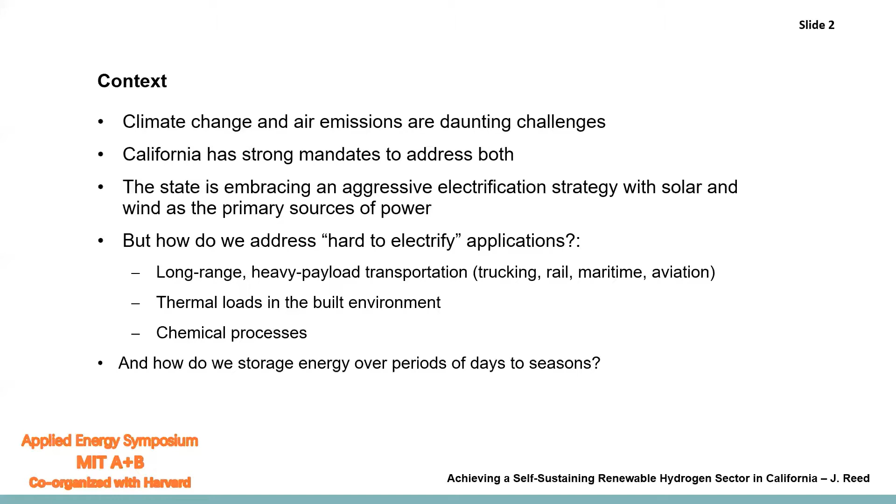We need solutions for thermal loads for certain chemical processes, and we have growing challenges of renewable intermittency on the electric grid, all of which can be addressed in part through hydrogen. A growing number of nations and regions are adopting decarbonization strategies that explicitly include hydrogen as one of the foundations. There are many of these, but they typically land on a fraction of primary energy of around 20%, plus or minus, being served by hydrogen.

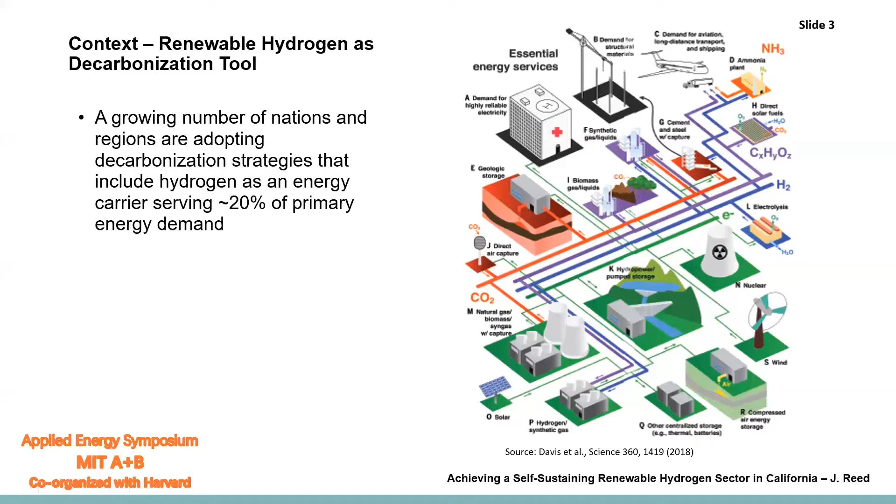In addition to hydrogen used directly, in combination with CO2, we can form hydrocarbons. So these purple and blue lines both reflect hydrogen to a certain extent. You can see that in this vision, hydrogen is a key underlying backbone of the solution.

California has launched the renewable hydrogen sector, but now we need to consider how to scale it up and how to make it self-sustaining. California is an early adopter of fuel cell electric vehicles and committed $200 million in support to provide an initial network of refueling stations, giving adequate confidence to early adopters of fuel cell vehicles that they'll have convenient refueling. We currently have 40 refueling stations and about 7,000 fuel cell vehicles, but we're expecting that to scale rapidly.

California lacks a comprehensive cross-sectoral roadmap for the evolution of the renewable hydrogen ecosystem and the financial and policy support needed to successfully launch and scale the sector. So the topic question here is: what will it take in terms of cost, time, and policy to achieve a self-sustaining renewable hydrogen sector in California, by which we mostly mean it's cost competitive and can attract private finance.

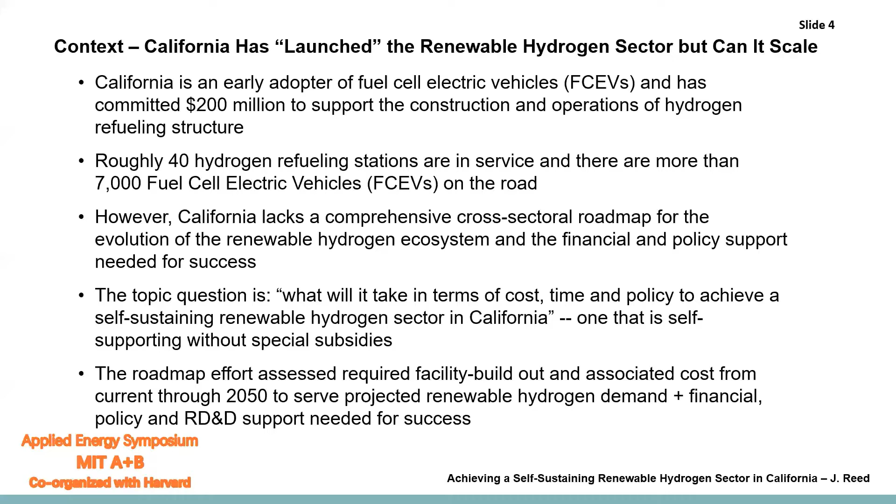The roadmap effort looked at the requirements for a facility build-out from now through 2050 and assessed the costs and then policy and related support needed to achieve the build-out. The analysis is built up in several building blocks. The ultimate goal is to understand how many renewable hydrogen production facilities are needed, phased over time, of what type, where they should be located, and what policy, regulatory, and financial support is needed to achieve that.

The key building blocks of the analysis are, first, how will the cost of dispensed renewable hydrogen evolve over time? That had three primary components feeding into it. The first was an assessment of the progression of renewable hydrogen production technologies, how they would evolve in cost and performance. Next, we assessed the cost and availability of feedstock going into those pathways. And finally, we assessed the costs of the supply chain after the plant gate to the point of end use, to create an overall picture of the dispensed or delivered cost of renewable hydrogen.

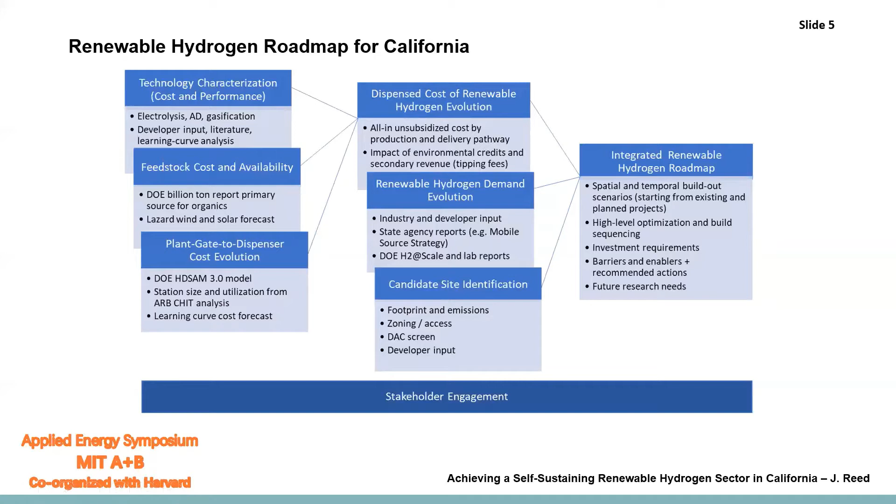Next, we needed to assess the evolution of demand in order to understand the number of facilities that need to be built over time to serve the growth in demand for renewable hydrogen. Finally, we needed to conduct an assessment of where the facilities should be sited. And then, with that picture of the requirements for the sectoral build-out and its costs, we could address the issue of policy, regulatory, and financial support needed for a successful launch and scaling of the sector.

So we considered a number of pathways for producing renewable hydrogen in this analysis. You can see here that there are quite a number of pathways that can be used for producing renewable gaseous fuel in the form of methane or hydrogen. Our focus here, of course, is hydrogen, but renewable biomethane can be reformed to hydrogen, and that's one of our primary pathways. So we considered three pathways.

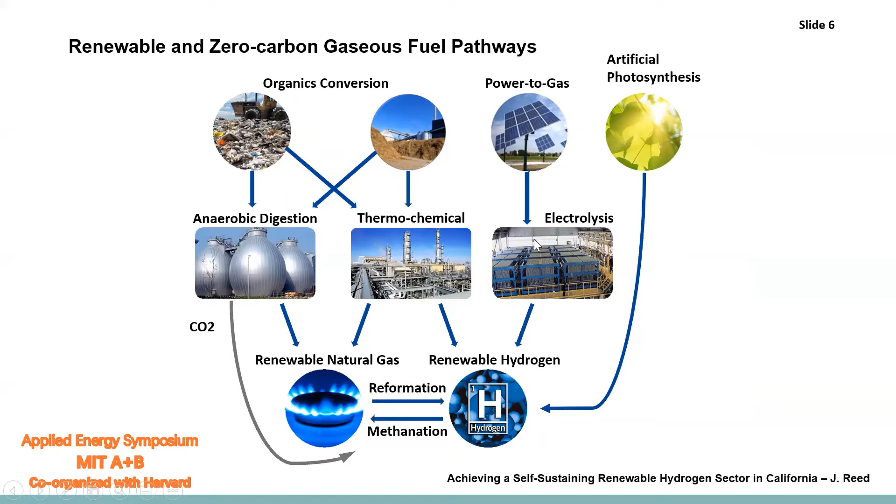First is anaerobic digestion of wet organic material, which is then reformed to create hydrogen. Next, the direct thermochemical conversion of woody biomass to make hydrogen. And finally, water splitting via electrolysis using renewable energy as the third pathway for renewable hydrogen production.

So just to jump forward to the bottom line, our conclusion is that the cost reduction trajectory for dispensed renewable hydrogen can be quite steep, and that in fact, within a roughly 5-year time horizon, we can achieve a point where renewable hydrogen is cost competitive on a fuel economy adjusted basis with conventional fuel. Over the long term, renewable hydrogen actually becomes less expensive on a fuel economy adjusted basis than conventional.

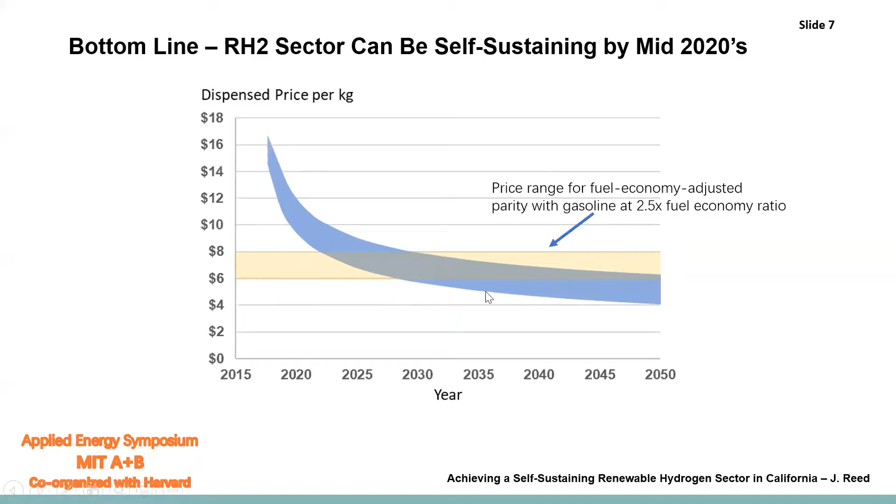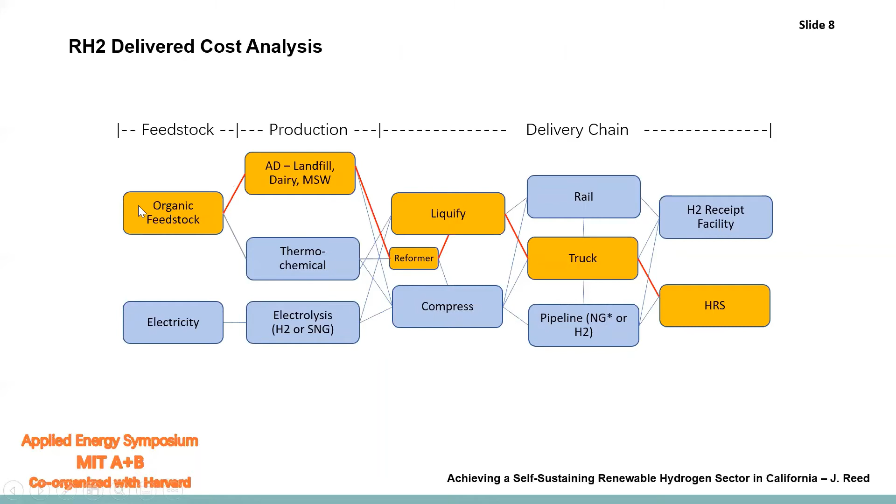By this time frame, however, we're competing not necessarily with conventional, but with battery electric drive as an alternative. At these cost levels, we expect that renewable hydrogen will be in the same cost range as renewable electricity in transportation. To build up this picture of delivered cost, we need to assess the costs of each component in the value chain, from the feedstock through conversion all the way through to dispensing. So we'll talk about that analysis here.

So the technology forecast was primarily an extensive secondary research effort, augmented by some of our own analysis, particularly on learning curve forecasts. The research that we consulted and conducted included a number of methods for forecasting. We did more than 40 interviews during the course of the work, but we also consulted a lot of other studies using expert elicitation, progress rate. The DOE's H2A tool uses a bottom-up approach, and we also can look at analogy or proxy. For example, coal gasification provides some insights to biomass gasification.

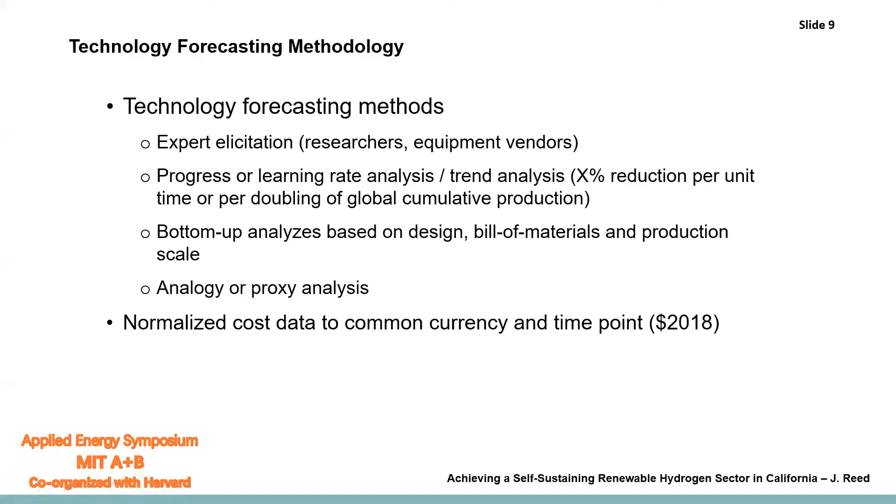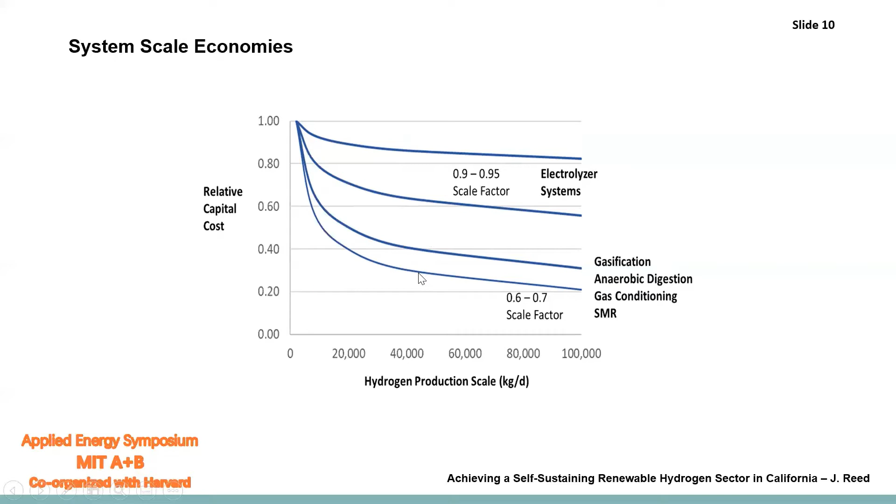Then we normalized all the cost data to a common currency and a common time point. And we also addressed other factors in the analysis, such as scale. Different sources would report facility costs at different scales. We normalized them to a common scale. And for our build-out analysis, we established reference plant sizes that reflect minimum efficient scale for the different technologies.

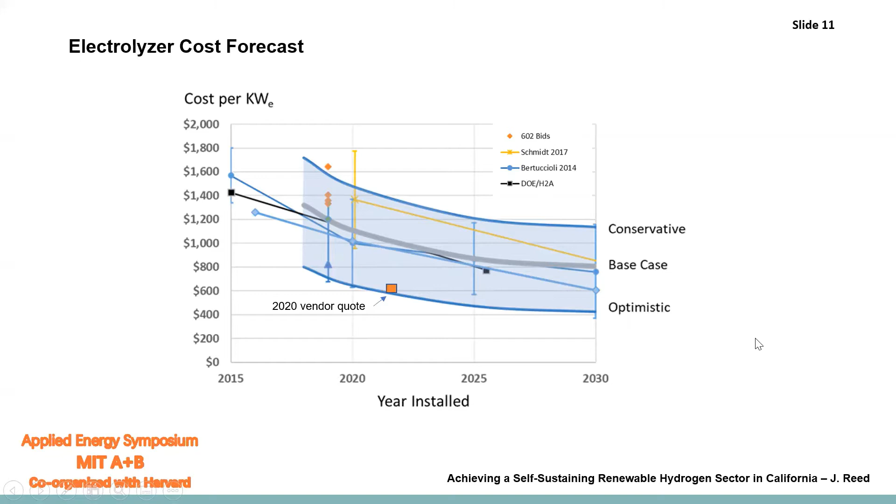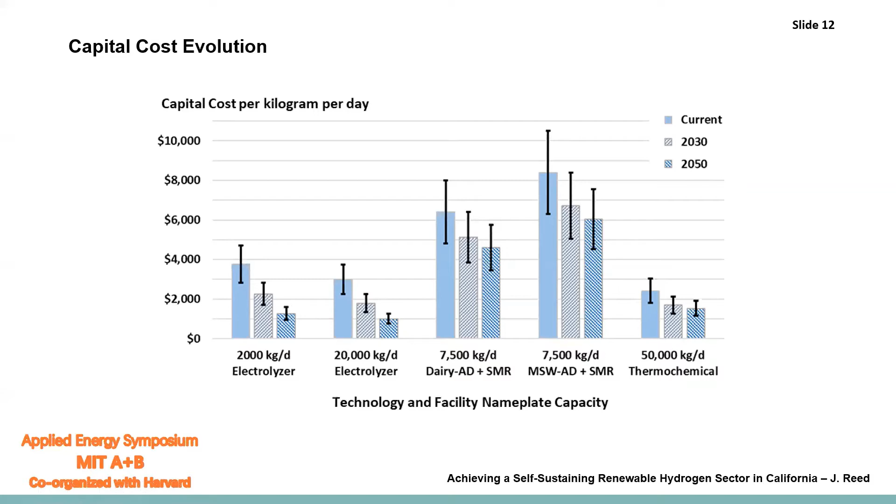So we performed similar analysis for all of the conversion technology pathways, and what you see here is the progression of capital cost across the different technologies. All of them are expected to show significant cost reduction. Electrolyzers have the highest learning rate among these different technologies, and so they show the most dramatic decrease in cost, both because of the higher learning rate and because currently they're in the earlier stages of deployment, where the other technologies have a higher install base to start.

The next component of the analysis is feedstock supply and cost. For the organic biomass feedstocks, we primarily used the Department of Energy billion ton study to determine the supply availability of biomass feedstock at various price points. We considered a price range for feedstock, or a recovery cost range, from $60 to $100 per dry ton. That yields a potential supply of 700 to 1,200 petajoules per year of raw biomass.

We also forecast the cost of wind and solar as feedstock for electrolytic hydrogen production, and adopted a forecast that's in range of what you're hearing from most sources these days, which is wind and solar will track below 3 cents per kilowatt hour by the late 20s.

However, electrolytic renewable hydrogen cost declines very rapidly as global installations of electrolyzers increase. And so by the mid-20s and forward, electrolyzers compete quite well on cost with thermochemical conversion, ultimately projecting to be perhaps a bit cheaper. Anaerobic digestion is a more expensive conversion technology, but as we'll talk about later, there are some policy mandates that will help offset this cost differential, such that the reformed biomethane pathways are on a net basis cost competitive with these others.

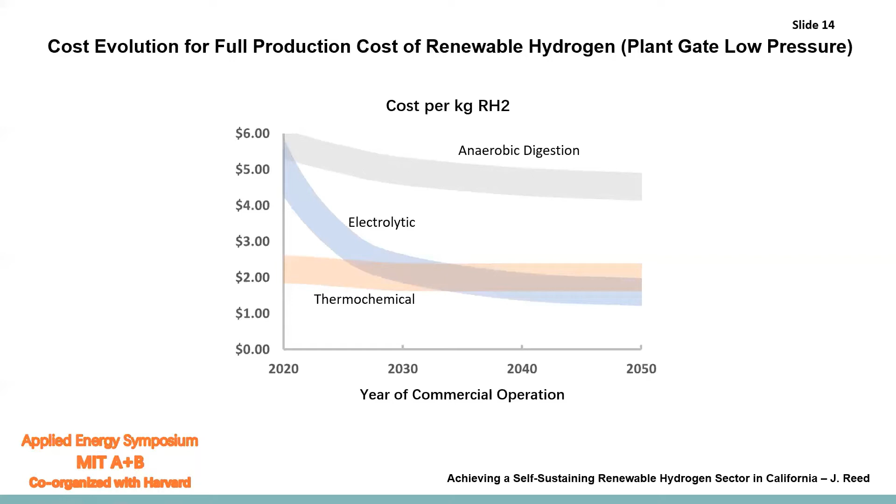So the next question is, what are the costs incurred from the plant gate through to the dispenser? There are two approaches used in the renewable hydrogen fuel supply chain in California: liquid hydrogen delivery and compressed gas delivery. So in the first pathway, the produced hydrogen is liquefied in a liquefaction facility and then put in liquid hydrogen tankers, which then supply that hydrogen to the hydrogen refueling station, storing it on site in liquid form and dispensing it as needed.

Next is the compressed hydrogen pathway. So in this case, the renewable hydrogen is compressed to high pressure, put into tube trailers, transported to the station, and stored on site in gaseous form. Our assessment of the cost for this part of the value chain was taken directly from a Department of Energy tool, the H2A Delivery Scenario Analysis Model, HDSAM.

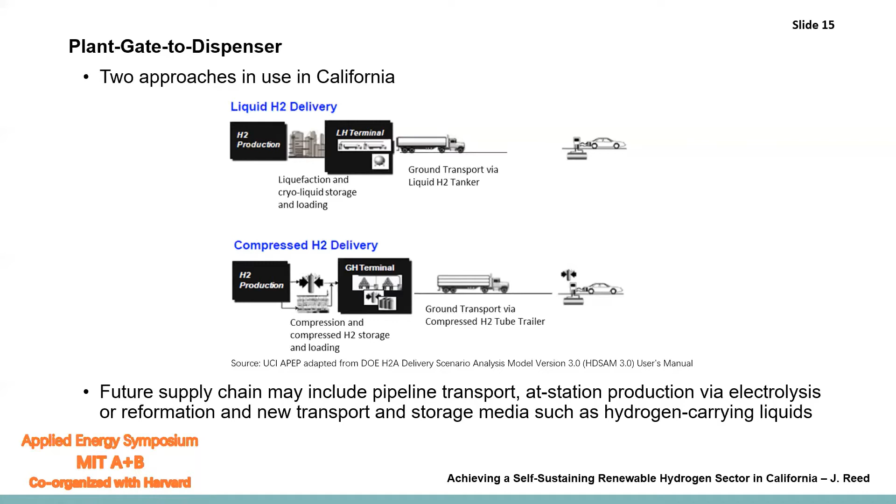The future supply chain may include other modes of transport, like pure hydrogen pipelines, at-station production, and new storage media such as liquid organic carriers and things of that nature. Those won't change the fundamental conclusions of the analysis because they'll be adopted to the extent that their economics are equal or better to what we're projecting with these current supply chains.

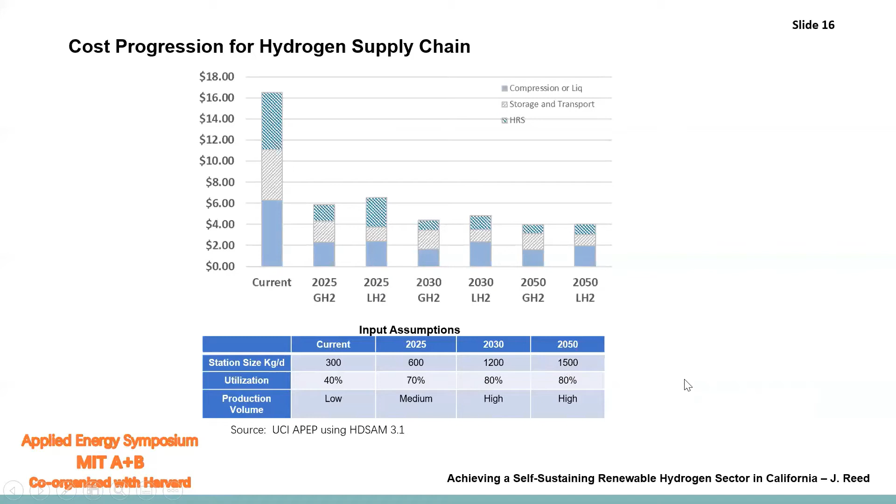In addition to the utilization, station size increases somewhat over time. As each generation of new stations are installed, they're becoming larger. And so there's some benefit of scale economies, but also global growth in the number of stations deployed will lead to standardization of solutions and cost reduction of components in the supply chain.

By 2030, many of them are within the target cost range at the midpoint of the projections. And this, at this stage, is without carbon credits. When those are applied, you'll see that we come well within the target range.

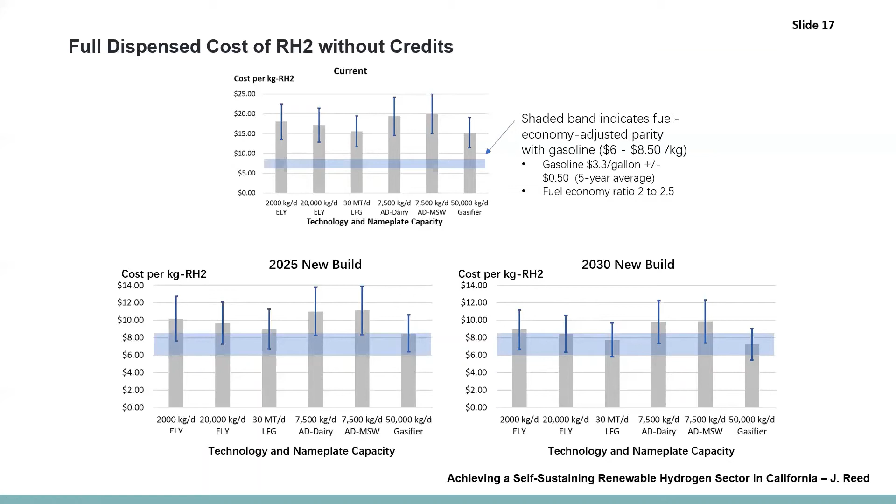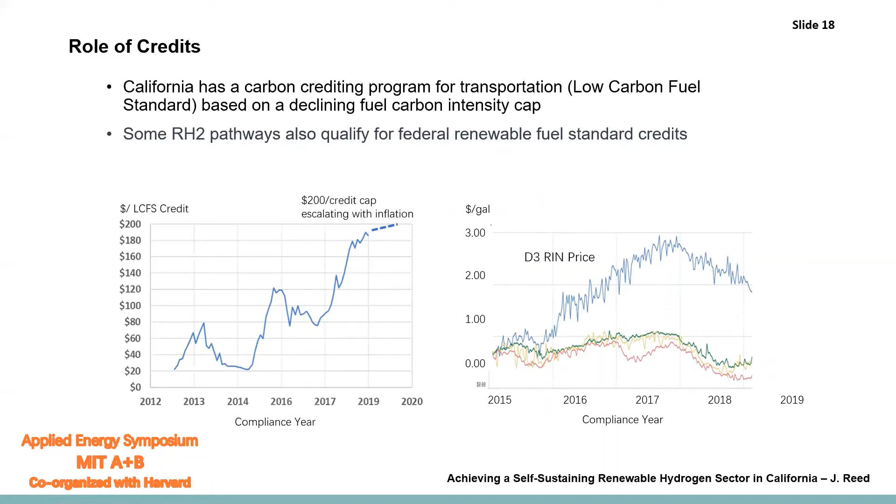So another policy issue, to the extent this program continues, is to ensure that all of the renewable hydrogen pathways qualify. So to give a little quantitative flavor of the impact of credits, the Low Carbon Fuel Standard Credit Program has a declining carbon cap, and basically fuels generate credits based on the difference between the carbon cap and the carbon intensity of a particular fuel.

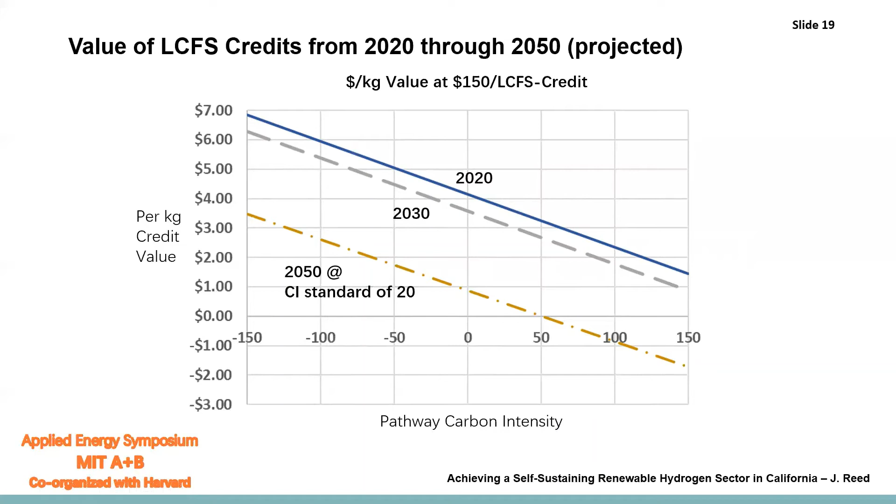So as that carbon cap declines, the number of credits generated by a zero carbon fuel reduces, and so by 2050, your LCFS value is much lower. And what that means is that the underlying technology costs need to progress in a way that they can make up for that difference. So quickly here, speaking of biomethane, there's a factor that comes into play there, which is not carbon credits, but it's tipping fees.

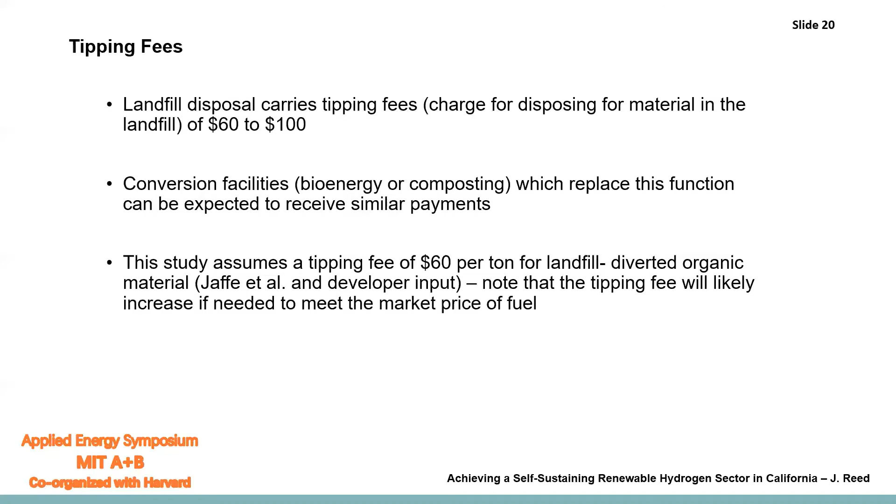California has mandates prohibiting the disposal of organic material in landfills, and it's a ratcheted standard. But by the late 20s, landfill disposal of organics will be completely prohibited, and so anaerobic digestion facilities become an effective disposal mechanism for that landfill diverted organic waste. And like landfills, we can expect those facilities to receive tipping fees from the parties, municipalities, and others disposing of the waste. That's currently the case, and we expect to see that continue. Those tipping fees effectively offset the higher cost of creating biomethane through anaerobic digestion.

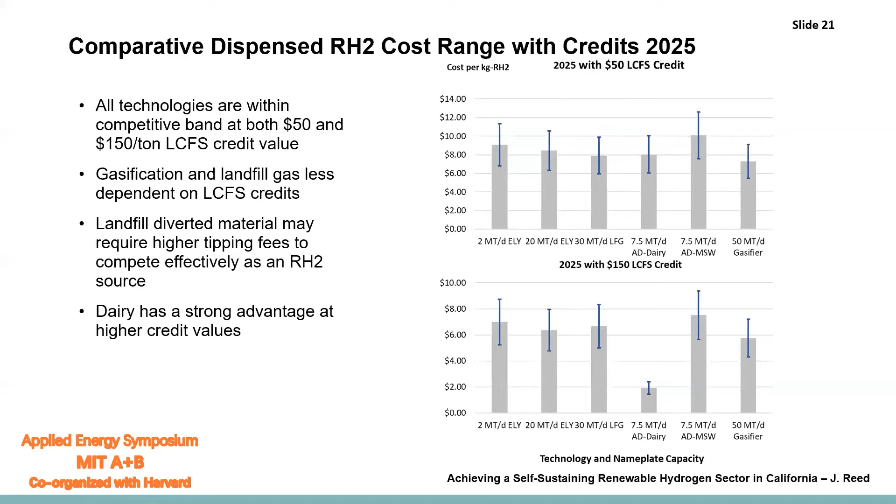So if we look at the cost comparisons, including credits at a $50 credit cost level and then a $150 per credit cost level, we can see that all these fuels are well within our target range by 2025 at a $150 credit value, and they're on the higher end of the range at a $50 LCFS credit level. One fact to point out is that dairy biomethane has a very low carbon intensity, so its net cost relative to alternatives depends a great deal on LCFS credit values.

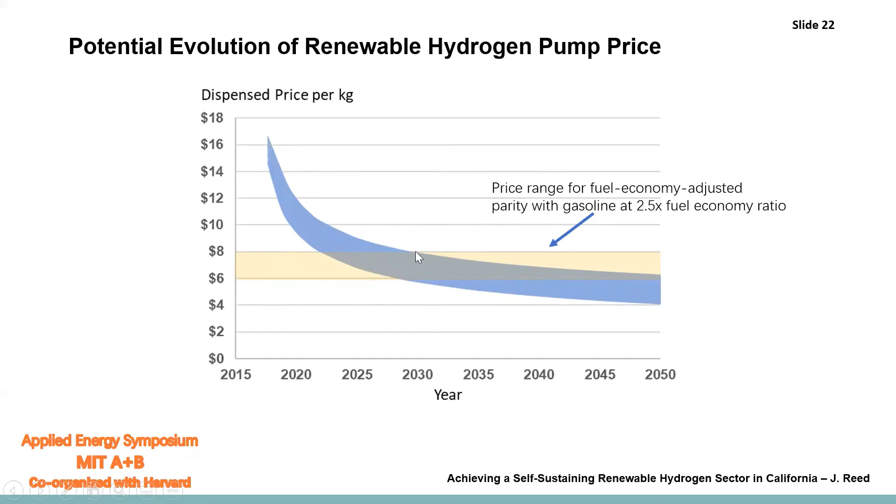So this gets back to the slide I showed earlier, and the analysis we've just shown is what supports this cost progression forecast. And then to reiterate, we see this coming into the competitive range with conventional fuel somewhere between 2023 and maybe the late 20s, depending on how costs project.

So now we turn to the question of demand. There are 65 million metric tons of hydrogen produced and consumed annually worldwide. All of these current applications, which are dominated by petroleum refining and ammonia production, are candidates for renewable hydrogen demand in the future. In addition to these traditional uses for hydrogen, new application areas come into play when we think about decarbonization strategies. So two primary additional applications that come into play are transportation and support of the electric grid.

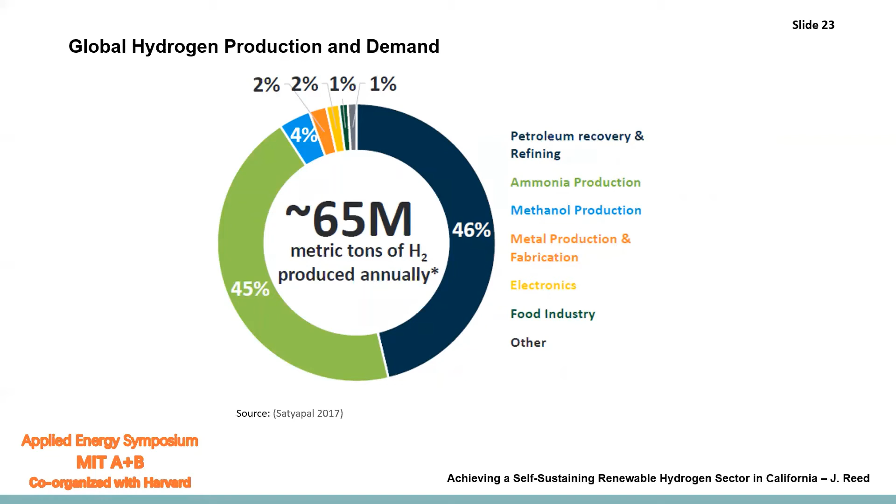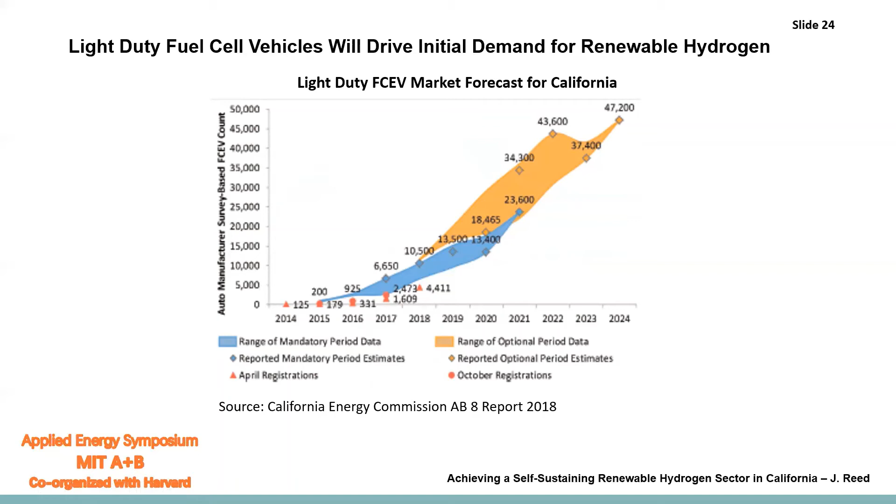But beyond the light-duty market, renewable hydrogen can be an effective solution for all modes of transportation, from local delivery, long-haul trucking, transit, refuse. But in addition, even higher fuel demand, higher payload applications like marine, rail, and there's even work ongoing to use hydrogen for aviation.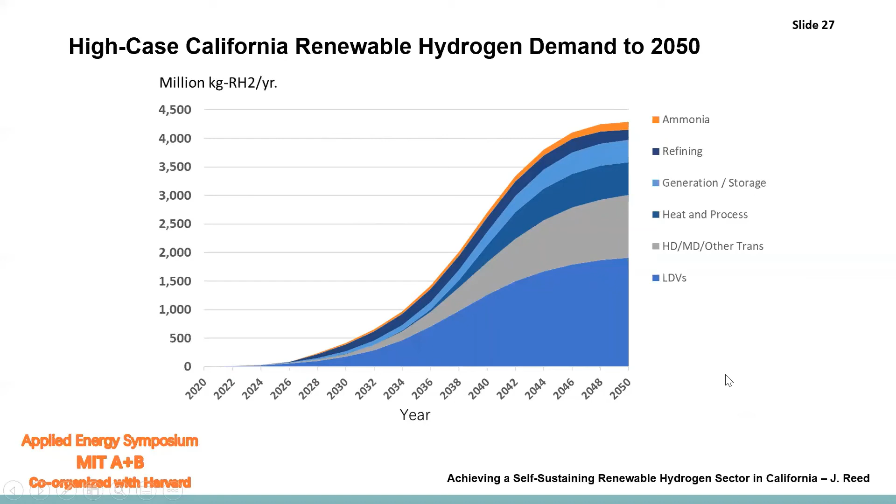But as you can see here, by 2050, this scenario projects 4.2 billion kilograms of renewable hydrogen demand in the state. So that's a lot of new facilities required to serve that demand. You can see that here.

So if we assess what facility build out is required to serve that demand, you can see in this figure a scenario depicting that. This figure shows the annual build of new facilities with these bars, with the colors reflecting the different technologies deployed in each particular year. The yellow curve reflects the aggregate growth in renewable hydrogen supply in the state. So we begin to see a ramp up in the late 20s.

The build out accelerates substantially in the 2030s and 2040s and is effectively complete in the 2050 timeframe, driven in large part by the timing of our decarbonization mandates in California.

So we'll need several hundred facilities to serve this load. That seems like a daunting construction challenge, and to some extent it is, but it's comparable to what we've seen in terms of build out in the wind and solar sectors.

The cost will be in the range of 50 to 75 billion, which also looks to be a rather large number, but for context, it's roughly equivalent to what we're spending in the petroleum fuel sector today.

So before moving on to the question of where these facilities should be sited, I'll just briefly talk about the technology splits or market shares here. For sake of time, I'll have to be pretty brief.

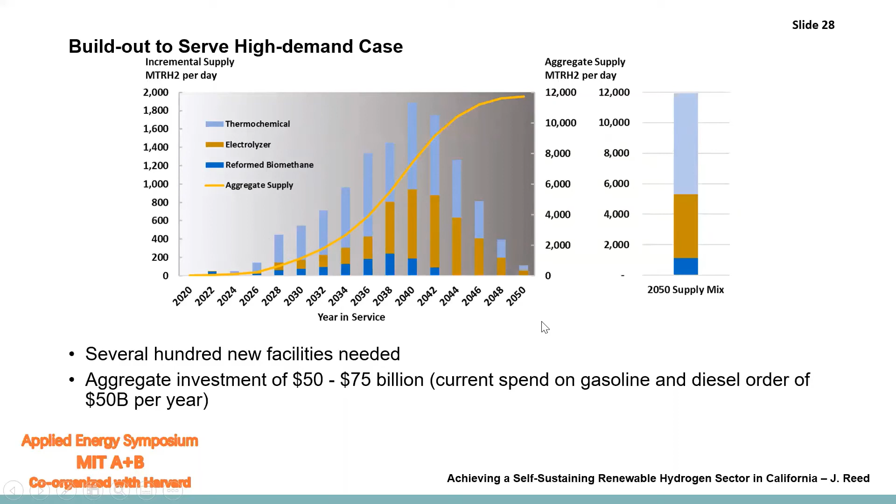So now we turn to the question of where these facilities should be sited, and I'm going to pick up the pace a little bit for the sake of time. We established first areas that were unsuitable for building facilities, and then for each facility type, we established land requirements and infrastructure accessibility. In all cases, proximity to feedstock is an important element of the siting analysis.

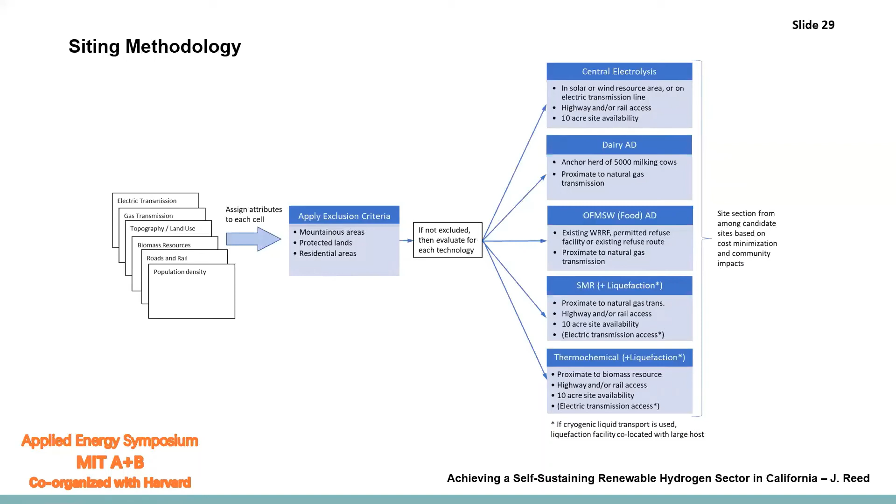So you can see that the different feedstocks are concentrated in different areas. In some cases, like thermochemical systems, proximity to feedstock is the dominant siting consideration, so that's where you'll see most of those facilities. The organic waste facilities are generally in urban areas, and dairy biomethane projects, of course, in the San Joaquin Valley.

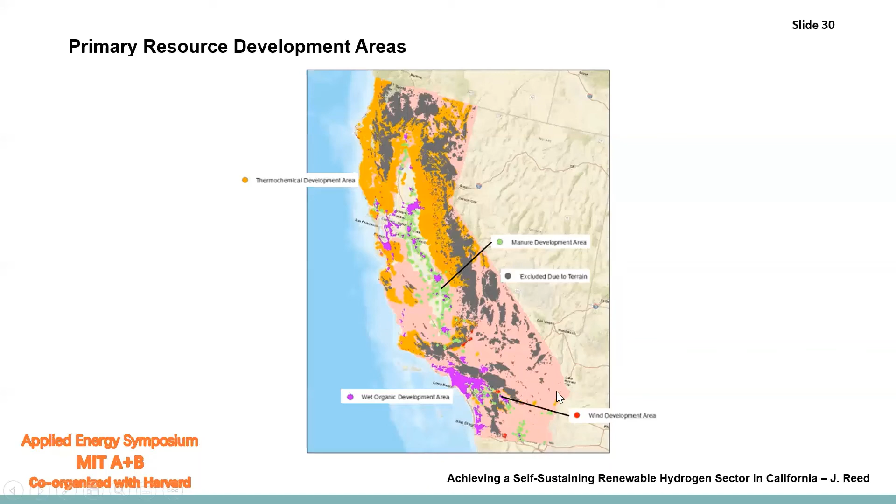And then electrolyzers could be sited either in proximity to the electric grid, if they're receiving grid electricity. We expect many of them will be co-located with wind and solar resources, so you'll see a lot of electrolyzer development in the wind and solar resource areas.

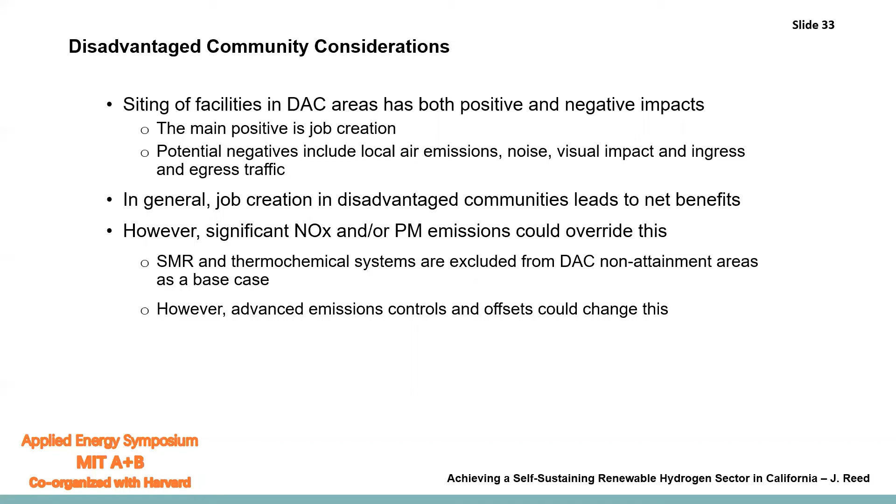We determined through the course of the analysis that more research is needed on this topic to better understand how these communities themselves would weigh positive impacts like green job creation against negative impacts such as local air emissions, noise, visual impact, and traffic. So what we arrived at doing here, again noting the need for further research, is we prohibited placement of facilities that create NOx or PM in non-attainment areas and in disadvantaged communities.

So here's a representative illustration of one of the spatial build-out scenarios, and as you can see, consistent with that build-out S-curve we showed, in 2025 we have a couple of dozen facilities of various types, but a lot of it is reformed biomethane. Later, going through 2030, we start to get more facilities, but also more representation of electrolytic and thermochemical, continuing in 2040. And by 2050, you now see that electrolyzers and thermochemical facilities are the primary sources of supply.

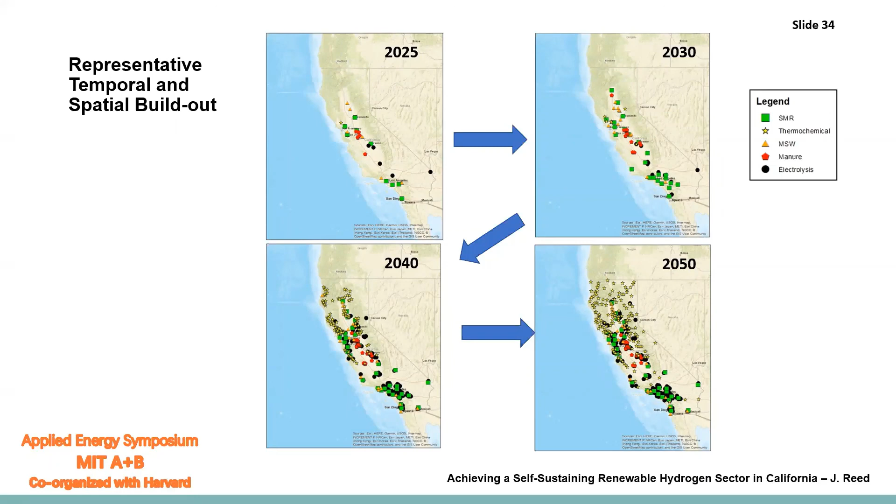So this kind of completes the picture of what the cost evolution looks like in the sector, what quantity of facilities need to be built, and where will they go. So we now turn to the last question, which is what sorts of policy support are needed to help all this happen?

So first, which was mentioned earlier on, the state does not currently have, quote, a renewable hydrogen strategy. The state's primary planning vehicle for its decarbonization strategies is called the AB32 Scoping Plan. So it's important that in the next iteration of that plan, hydrogen is specifically reflected on a cross-sectoral basis so that we can drive policies in an integrated way.

Next, we need to expand policies and programs within the hydrogen sector to the entire value chain. The early focus has been on hydrogen refueling stations, which is appropriate given that light-duty vehicles are the anchor of this new source of demand, and we need some fueling stations to provide confidence to drivers. But as the sector begins to scale and we bring in new applications, more vehicles, and include heavy duty in these things, we need to place more focus on the remainder of the value chain and on the production

end in particular. We need to design programs and incentives in ways that help attract private capital down the road. So examples of those type of program features would be loan guarantees as opposed to grants, for example. So loan guarantee programs typically require the same type of diligence that a commercial lender would require, so they can be supportive of commercial financing of the next generation of projects.